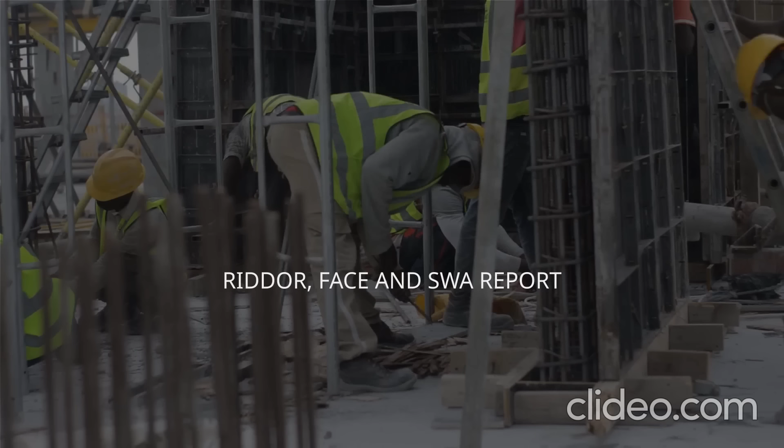In the case of the Houston accident, there were 7 injuries in total, of which 3 were seriously injured, who required special attention and were reported as serious cases. However, the remaining workers suffered minor injuries. Though some of the workers suffered minor injuries, all the injuries and death casualties were immediately reported because of the

severity of the case. The reason this accident created hype was that the Houston crane accident was not the only accident that occurred in the USA. There had also been a series of accidents reported, such as the crane accidents of New York 2007 and Miami 2008. FACE and SWA report.

Similar to the RIDDOR report, under which the deaths and injuries of the occupational class are reported, the FACE and SWA reports also function similarly to the RIDDOR framework. These FACE and SWA reports were developed in the year 1970 by the National Institute for Occupational Safety and Health, NIOSH, which is the United States federal agency that conducts research and proposes recommendations for the prevention of work-related injuries.

The FACE reports are basically a national research program that is similar to the RIDDOR program and is mainly aimed to provide guidance to prevent employees and workers from job-related injuries and deaths by following some guidelines and considerations. According to the research study conducted, these programs and frameworks investigate selected fatalities and identify and evaluate hazards.

Furthermore, these frameworks also provide guidelines related to the development of workplaces, meanwhile providing prevention and recommendations to the employees and all associated stakeholders. The effectiveness of the SWA report, which is very much similar to the FACE report, is well accepted. Since its introduction, it provides perfect guidelines and precautions to the workers regarding their safety and health management issues,

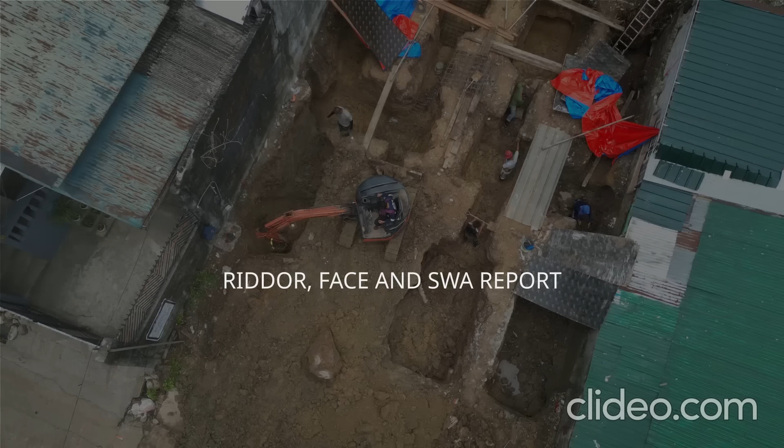The realization and need for seeking informed decision-making support in project management have enabled the health and safety managers to utilize the knowledge in demanding areas like management of megaprojects to ensure health and safety. Learning lessons from past experiences can be effective in minimizing the chances of accidents in the construction and management processes. Similarly, considering the case of subway construction, in the past several cases have already been reported related to oxygen cylinder explosions, which have also caused several injuries and deaths.

However, the management of subway construction did not take special attention and was not fully aware of the danger that leads to the casualty; things can be done after an accident that can minimize the effects of the accident. The understanding and examining of accidents is only possible by determining every single cause of the accident. Evidence-based learning methods have been the most effective approach that professionals and clinicians have adopted. It has been rated as an instrumental approach to support effective professional learning and problem solving.

In light of the study conducted, evidence-based practice has been introduced in clinical practice for carefully examining and implementing best practices in decision-making. Furthermore, the general practice of evidence-based learning involves the assessment of patients, specifically asking particular questions of patients regarding the incident or any casualty. In addition, evidence-based learning also involves appraising the evidence and incorporating it with clinical expertise, meanwhile evaluating the performance. However, evidence-based learning for health and safety management in megaprojects involves the consideration of facts, experiences, expectations, the project guidelines and regulations, meanwhile considering the project design through a similar procedure.

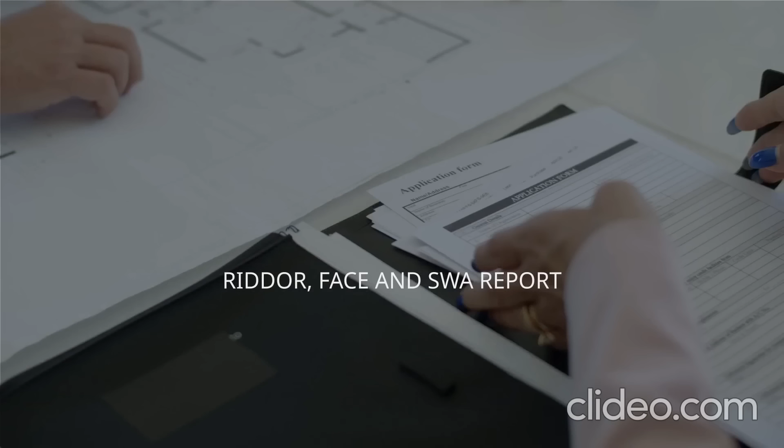According to the research study conducted, evidence-based learning has greatly integrated evidence-based management. In addition, evidence-based learning in light of management has both levels, strategic and tactical. In the complex world of construction megaprojects, effective health and safety management is crucial.

This research introduces an evidence-based health and safety analysis framework designed to bridge gaps in current practice. By utilizing proven methods such as the RIBA plan of work and drawing insight from documented case studies and incidents, the approach enables systematic learning from past experiences. The goal is to deliver actionable lessons and structured processes, supporting safer, more efficient management throughout the entire project lifecycle. Through this, the research study aims to minimize the literature gap regarding evidence-based learning associated with health and safety management in megaprojects.

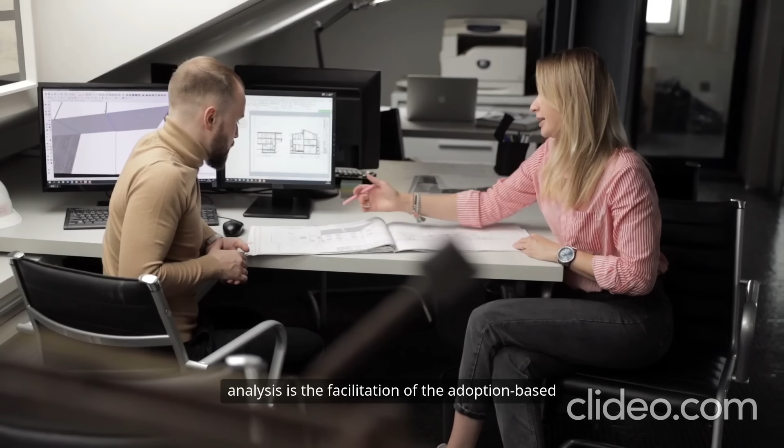Technical analysis. The fundamental rationale behind carrying out technical analysis is the facilitation of the adoption-based method, which is going to be used for the purpose of evaluating the safety management process that is going to be used in the process of further safety and management initiatives.

The individual that is responsible for carrying out the technical analysis of EHSA is the health and safety manager of the building. It has been found from the overview of literature in this regard that the framework for EHSA includes RIDDOR process, staged building refurbishment processes, and the process of decision-making of EHSA.

The procedure of the entire work has been based on the implementation of EHSA framework in the specific construction-related accident that needs to further fulfill the requirement of the existing procedure that can be applied to the practice.

The purpose of this research is to incorporate a formal procedure that could cover the life cycle of the building while covering the need of incorporating the technical review on the prospect of health and safety management in the context of construction-related accidents. Therefore, the plan of work offered by RIBA has been ideal for providing the work procedure which is then to be adopted for EHSA framework for construction-related accidents.

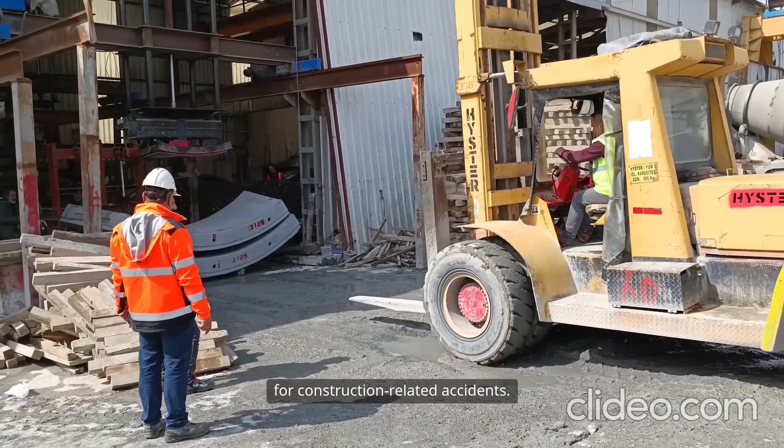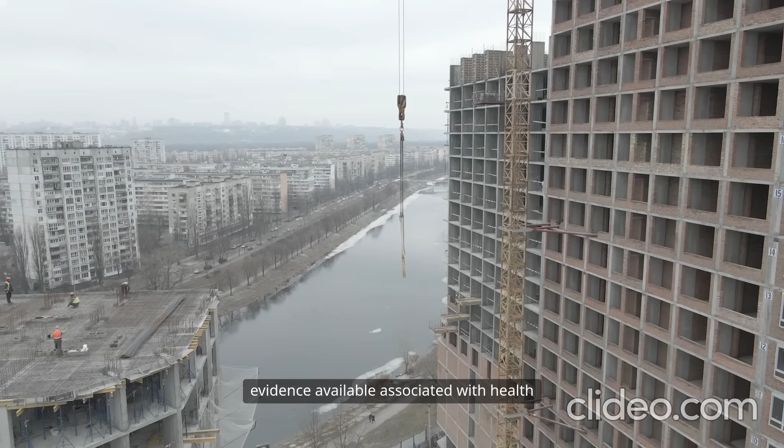The implementation of the framework of EHSA also required the case base that can provide a due amount of evidence related to the areas as well as from the past projects incorporated by the site management that will conduct and apply the EHSA framework and the ones present on local and international level. Even there were numerous other sources of evidence available associated with health and safety management in megaprojects.

One specific source of evidence, for instance, the documentation from the RIDDOR, has provided the structure of the case study that has been based on the information that was available on RIDDOR and other databases. Therefore, the particular structure has been needed for the case study in order to collect information in the consistent format, which would further help to retrieve evidence from EHSA case base.

The conceptual framework for the safety and health management at megaprojects of construction has been developed in accordance with the technical analysis. Technical description. The systematic technical framework has been developed at the first stage of the research paper.

As it has been demonstrated, the framework has been designed for the purpose of including all the activities in order to implement the generic and evidence-based learning and work procedure, and for that RIBA plan of work has been chosen in order to adapt for catering the need for using the EHSA framework in the health and safety management of the construction projects.

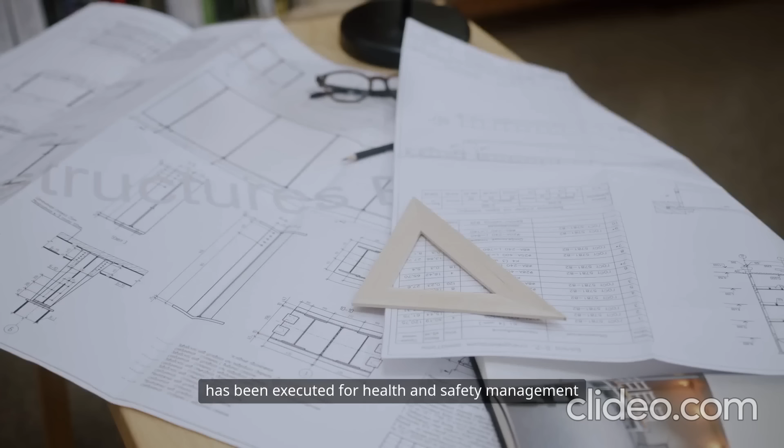All the activities of EHSA framework, as well as its technical steps, are all interrelated in order to ensure that the effective application of the evidence-based learning has been executed for health and safety management at the construction megaprojects. There are certain activities which are going to be carried out for the purpose of carrying out megaprojects. These projects are extremely large-scale projects with large-scale investments.

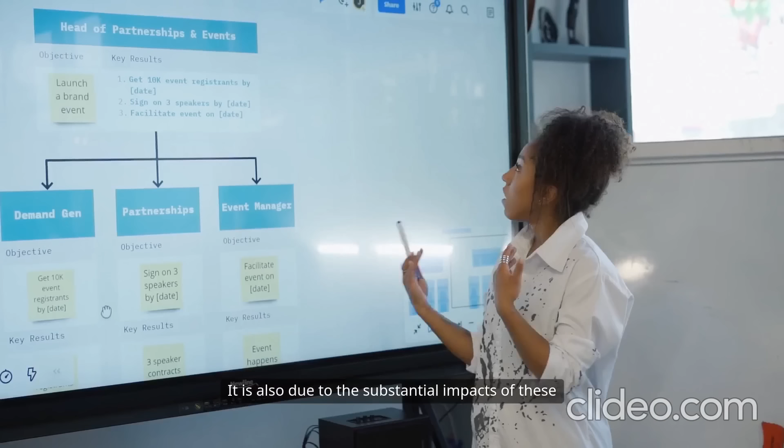The megaprojects are also categorized as extremely expensive and complex on both human and technical terms. With respect to this, these projects require robust development and planning, due to which these projects obtain higher public attention. It is also due to the substantial impacts of these projects on communities, budgets, and environment, as well as the involvement of high costs. Therefore, these projects are physical initiatives having a capability of being expensive and public. Following are the activities. About the long-term needs of construction project management.

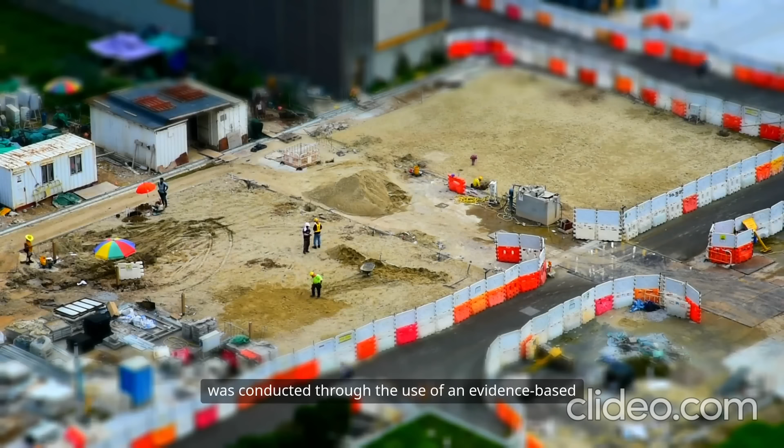This paper aims to provide an evidence-based health and safety analysis, EHSA, approach, and a list of reliable lessons learnt on health and safety in building refurbishment project. The research described in this paper was conducted through the use of an evidence-based method, EBM, underpinned by literature review and case studies. This paper describes a generic EHSA framework to support the use of knowledge reuse in practice-oriented research into health and safety management on building refurbishment.

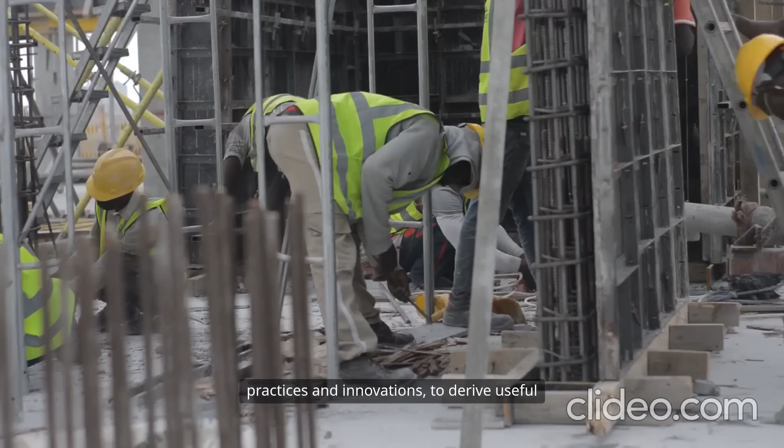This paper aims to facilitate the collection of data and information from accidents and failures, as well as contemporary good practices and innovations, to derive useful lessons to inform improved practice in safety management in construction projects. Through the use of the theoretical framework, this paper demonstrates, through case studies, how this EHSA approach can effectively support learning lessons from previous construction projects.

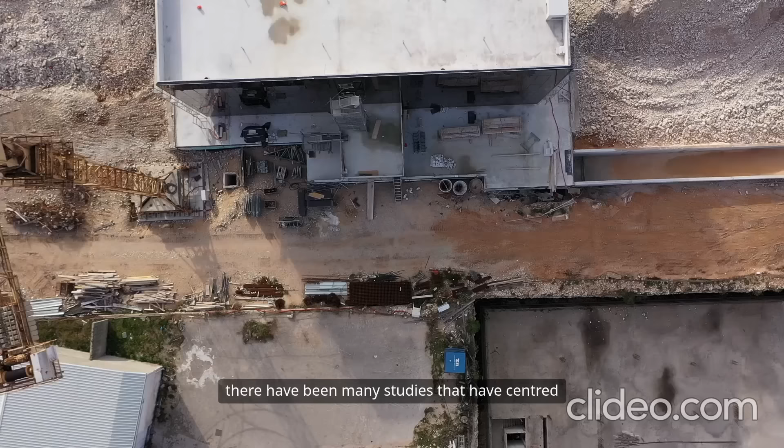It is expected that this paper can make a good contribution to the body of knowledge by providing the new EHSA approach and a list of reliable lessons learnt with regards to construction health and safety. In the last decade, there have been many studies that have centered their attention towards assessing the best health and safety management procedures for building refurbishment and construction projects, considering environmental impacts in developed as well as developing countries. It is essential to consider this aspect in existing construction projects and new construction projects.

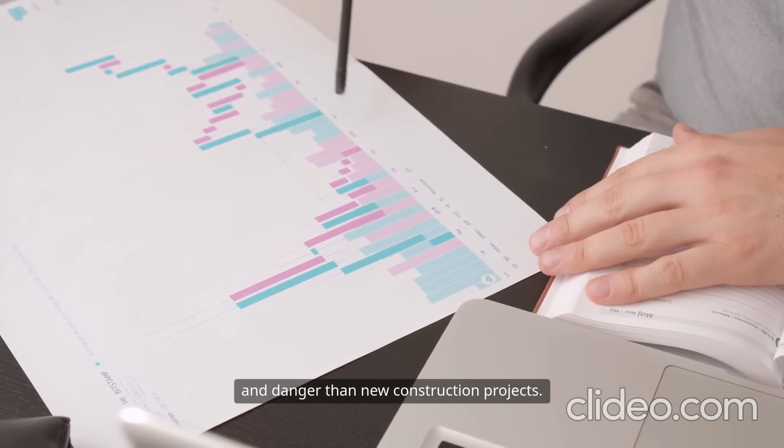This paper aims to provide an EHSA approach and the consistent lessons learned on health and safety in mega construction projects for evidence-informed construction management and mega construction projects. Mega projects involve more uncertainty and danger than new construction projects. All those who contribute to the planning, design, construction, commissioning and management of a mega project need to be aware of the potential health and safety risks that might arise.

Construction project refers to the working on the current construction so as to enhance their environmental performance by taking sustainable processes and procedures into account. Herein, sustainable construction is similar to sustainable improvement that associates with construction of buildings.

Mega construction projects comprise more uncertainty and risk about the health and safety issue than other projects. The projects are associated with economic as well as technical uncertainties, and these risks need to be reduced by adopting safety management procedures. According to the research, there are 5 types of risks related to mega projects such as design information risk, cost risk, external and internal risk, and client briefing risk as well.

Based on these aspects, the paper will not outline the risks associated with mega projects, but it will establish the background of the study while formulating the objectives and understanding the research methodology that would be incorporated, taking into account assessment method and proposed solution, lessons as well as recommendations while responding to the refurbishment of the building.

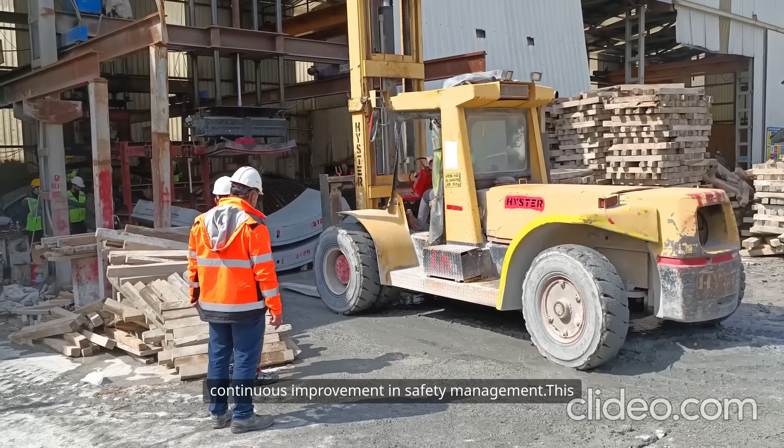This paper aims to provide EHSA approach and a list of reliable lessons learnt on health and safety in building refurbishment projects for evidence-informed health and safety management. This research has been conducted considering the following objectives to achieve the aim. A theoretical framework called EHSA approach to support the use of EBM in practice-oriented research into health and safety management for building refurbishment. A procedure to implement the framework to collect data and information from accidents and failures, as well as contemporary good practices and innovations.

Also, to eventually derive useful lessons to apprise improved practice in safety management while building refurbishment. A demonstration through a case study as to how EHSA approach can effectively support learning lessons from previous building refurbishment projects. The research methodology adopted comprises a detailed literature review highlighting the aim and objectives of the study.

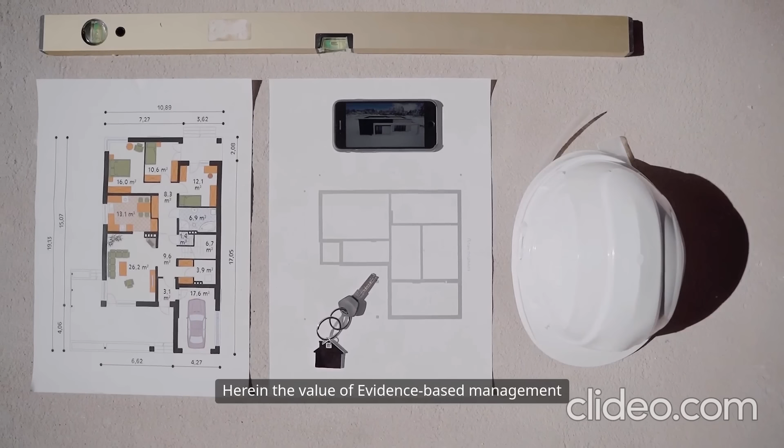Herein, the value of evidence-based management in managing risks and its significance is outlined through EBM framework. Following which, ESHER and its importance are highlighted by detailing a theoretical framework of the ESHER approach and its implementation procedure. Furthermore, information safety management is defined, and a case study is discussed, subsequent to which the lessons learnt from the case study and recommendations for the same are outlined in the research showcasing and asserting the aim of the study.

The infrastructure and construction industry is the most demanding and at the same time, the most vigilant industry. It demands the workforce involved in this industry to be attentive and observant. Through the survey conducted by APM, it has been highlighted that 50% of the issues and workload has been found in the infrastructure and construction domain. There have been many accidents reported in this industry because of sheer ignorance, incompetence, and inability. It has also taken lives of innocent people, which needs to be mitigated. However, approaches such as EBM and ESHER comprise such regulations and framework which help in mitigating such risks and providing a stable and error-free certification.

As the mega projects are complex and unique in nature, there is need for a strong procedure to finish within the stipulated process. As per the current practice, the major stakeholders are serious about the stipulation of boundaries, but there are no such strategies which can control the systematic progress. Unfortunately, knowledge reuse is also not used by the industry practitioners. The study has been directed at understanding how health and safety management is important in the process of construction projects. With the advancement in technology, a lot of procedures and functionalities have changed, and it has also improved the skill set of the workforce. Evidence-based learning enhances sustainability and is a significant step towards safety management during construction.

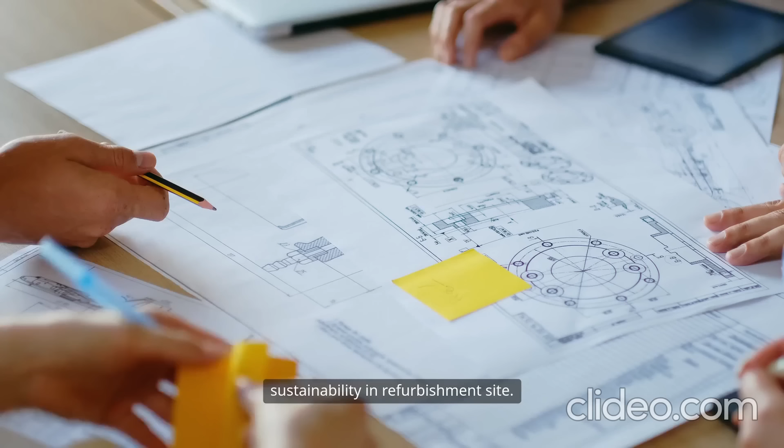By utilizing knowledge reuse strategies, the mega projects industry can reduce risks at mega project sites in a systematic and operating process. On the other hand, the construction strategies recommended can be taken into consideration, which will make sure of selecting the right techniques and tools in managing and reducing risks. This will also enable them to optimize production and select right materials to minimize the impact of refurbishment risks and collapses. Moreover, the EBM framework will ensure good work quality by maintaining sustainability in the refurbishment site. By adopting building refurbishment techniques and strategies, UK refurbishment industries can upgrade their quality of performance by making reasonable changes, which will lead towards success.

EBM became a mainstream conception during the 1990s, and it started becoming acknowledged as an approach which considers and integrates the notion of ecological as well as socio-economic connectivity along with holism. Also, EBM outlines sector-based approaches to managing the process of refurbishment. The study also outlined the equivalent standard approach, which comes under alternative safety approaches, ASA, constituting evidence-based safety analysis, ESHER.

Implementing ESHER under the ASA process necessitates commitment and seriousness from both parties, and before implementing it, expectations are that all the applicants have had an interaction with the safety authority. The ESHER comprises an application and a proposal which is submitted as an application package to the safety authority.

Once the package is reviewed by the authority, they might ask for more details before deciding on something. Once they determine the proposal, a written notification is sent out for the proposed outcome. It depends on the Safety Authority Board to accept or reject the proposal as deemed fit.

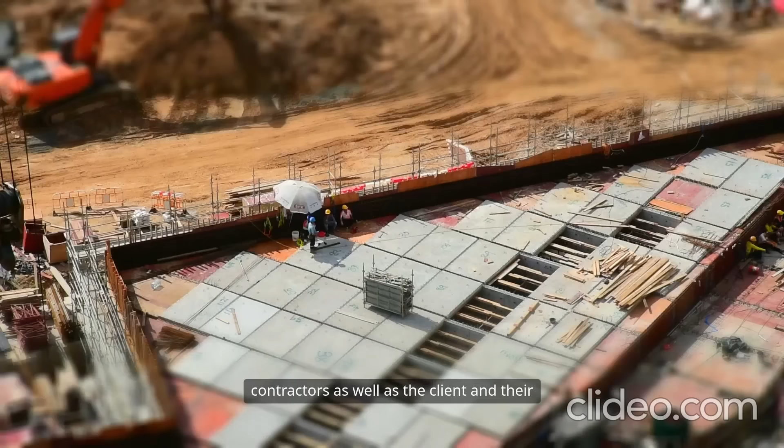The accidents on the site can impact the contractors as well as the client and their business in building refurbishment. It may affect the efficiency and productivity of the labour and employees related to the refurbishment work. It may also result in people leaving the work for injuries and sick leave. The revenue generation of the project could decrease due to the specific delays in completion of the work or because of the damages to the structure that are caused by the unplanned collapses.

The ESHER is important in the refurbishment projects. This concept states that during building refurbishment, the health and safety concerns should be taken into consideration. All the new buildings must first undergo scrutiny so that it is known how safe the building would be in refurbishing. This would also mean that the building refurbishment is carried out and safety concerns are determined by recording the evidence. Therefore, ESHER is important in this respect as well.

Health and safety measures play a pivotal role and possess a great deal of influence in the management and designing of refurbishment projects. It can be specifically stated that health and safety measures are one of the key factors in the selection of the methods of demolition for avoiding structural instability and preventing structural collapses.

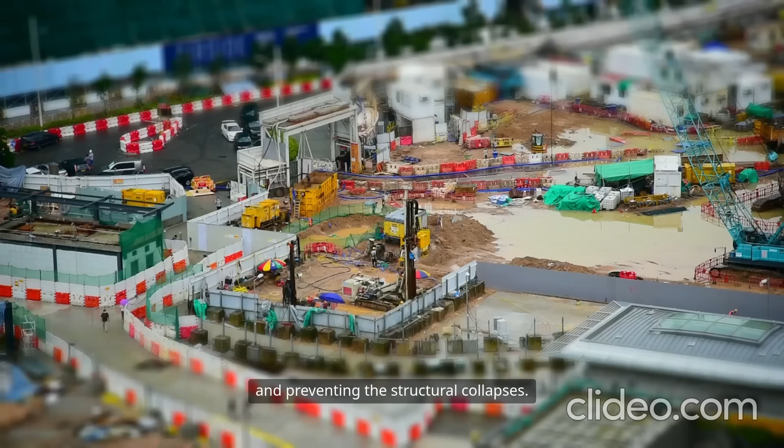It is quite critical to identify the structural collapse events with conventional and unconventional causes. Unconventional causes are related to catastrophic and natural events like floods, earthquakes, avalanches, etc., whereas the conventional causes can be verified, reduced, controlled, or removed.

However, evidence-based safety management is an essential aspect since it assesses the economic cases of refurbishment comprising impact on communities and residents, focuses on energy and carbon implications compared to refurbishment, and also integrates social factors. Also, the UK supply chain market lacks sufficient information, so evidence-based safety management assists the market to consider varied hidden costs which are related to refurbishment.

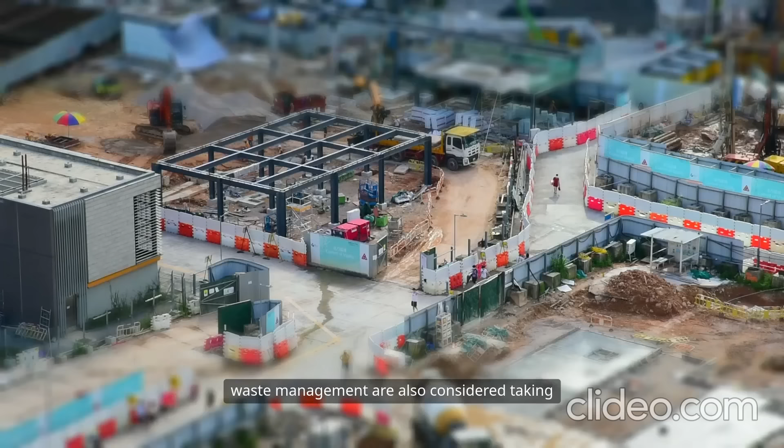Considering the current standards of newly built houses outlines that such houses have low operational energy as compared to old ones. But refurbishment of buildings can accomplish lower operational energy levels and can switch fuel sources taking renewable resources into account. Other essential aspects such as water and waste management are also considered, taking into account social factors of well-being, housing, health and urban design as well.

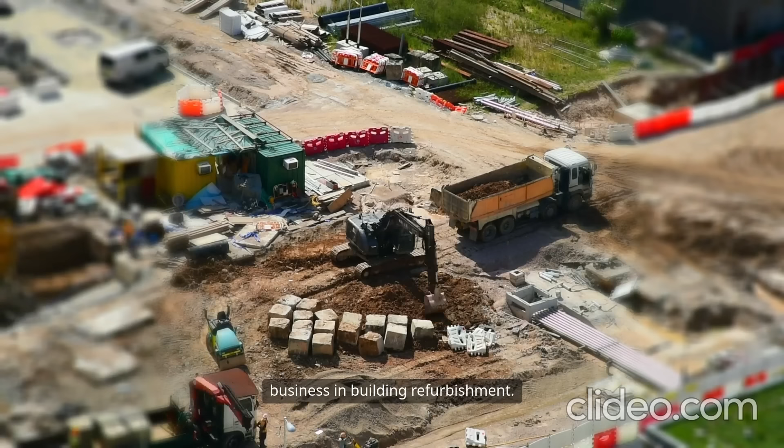The accidents on the site can impact the contractors as well as the client and their business in building refurbishment. It may affect the efficiency and productivity of the labour and employees related to the refurbishment work. It may also result in people leaving the work for injuries and sick leave. The revenue generation of the project could decrease due to the specific delays in completion of the work or because of the damages to the structure that are caused by the unplanned collapses.

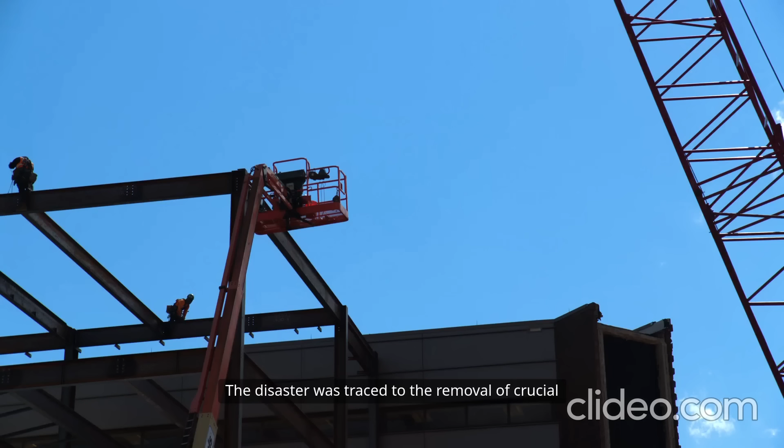The tragic collapse of the Ashford building, resulting in the loss of 4 workmen's lives, highlights the dire consequences of inadequate safety management during refurbishment. The disaster was traced to the removal of crucial structural elements, a mistake rooted in poor oversight and a lack of proper risk assessment.

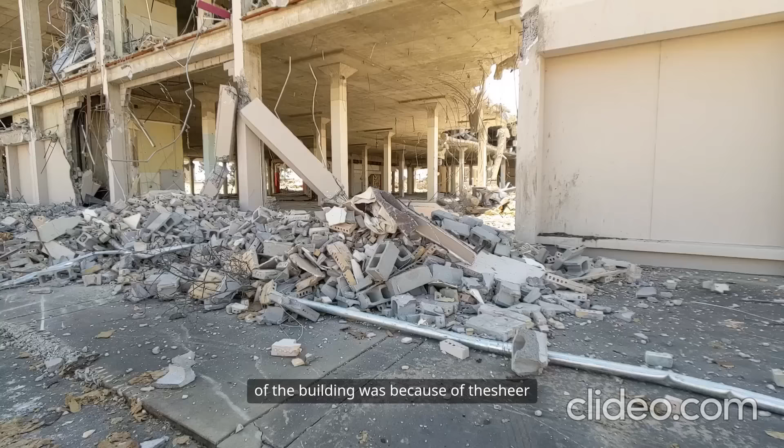Implementing evidence-based management and the ESHER approach could have averted such tragedy by ensuring safety protocols were informed by past incidents and best practices, ultimately safeguarding both workers and buildings. The case of the Ashford building, where 4 workmen died because of the collapse of the building, was because of the sheer incompetence of the construction workforce.

A published report stated that there was no problem for a long time since the load of the bricks above was distributed through the building by the adjacent window frames and blockwork. When refurbishment started, the workers began removing this blockwork, increasing the structural load on lightweight concrete blocks. It resulted in the rapid and disastrous collapse of about 2/3 of the building. It was sheer irresponsibility of the people who were engaged in this construction work, and it was all on the management.

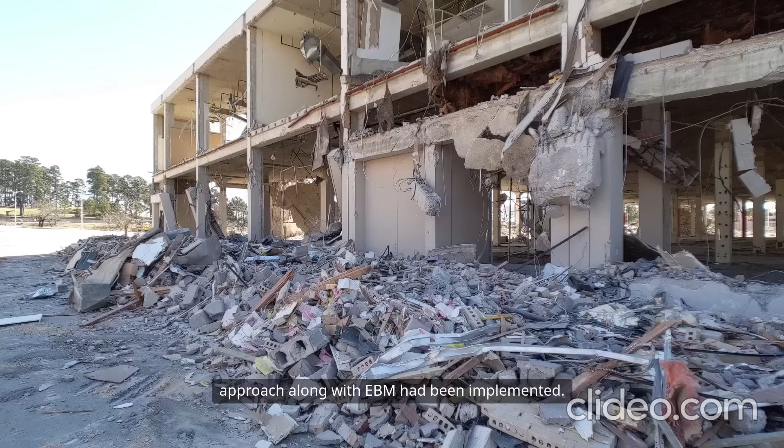As per the case study which resulted in the death of 4 workmen, the accident could have been avoided if ESHER approach along with EBM had been implemented. It has been learnt from this research that EBM for safety management for the building refurbishment is the most effective method. This is because this method helps in facilitation about information and data collected from the accidents, as well as failures and innovative designs. It has also been learnt that ESHER is helpful for safety management in the building refurbishment.

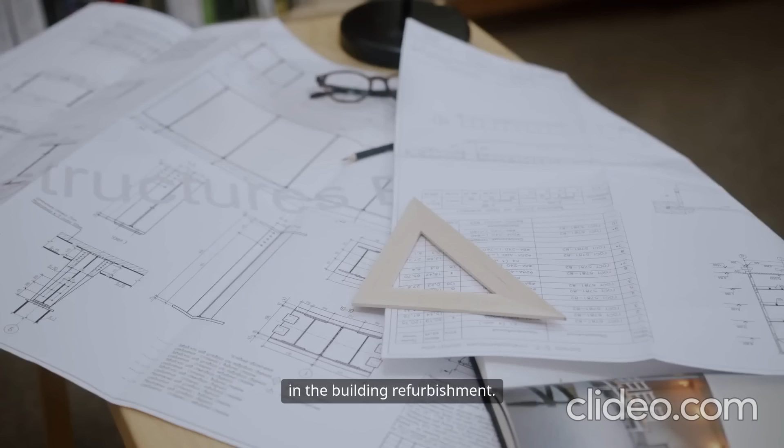Based on the research undertaken, building refurbishment requires a lot of safety and consideration of several factors to ensure that all risks involved are managed effectively to minimize any dangers. It is intended particularly for clients in refurbishment firms who have limited experience of refurbishment in buildings, but it has lessons for more experienced experts. The entire study shows that the refurbishment industry needs to have the proper accessibility of the safety measurements and need to make good use of the safety management tools.

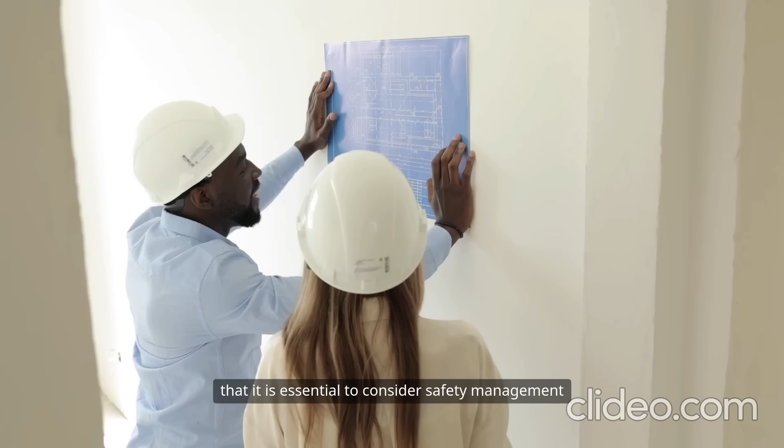The understanding developed through EBM and ESHER approach helps in analysing the situations that it is essential to consider safety management before refurbishment of any project. Thus, there needs to be a proper risk, as well as the safety measurable policies, which will ultimately help in governing the different measurements as well as to give the better productivity out of it. The healthy environment is crucial for the staffs that are working there. They need to be protected and secured enough. There need to be proper treatment regarding the hazardous wastes, and at the same time, the relevant enactment of the different rules and the procedures.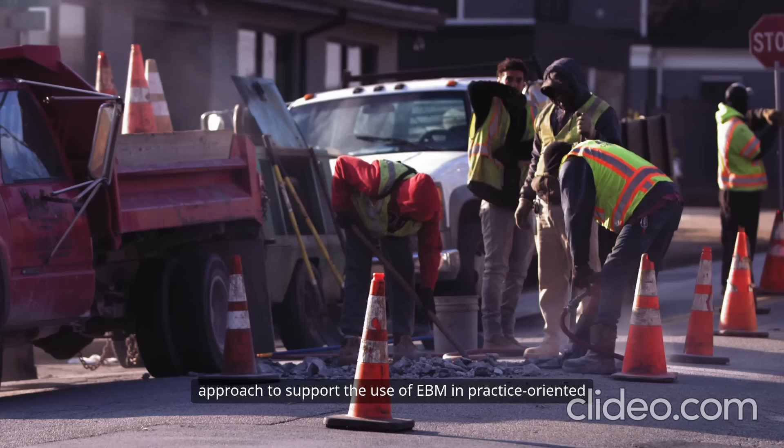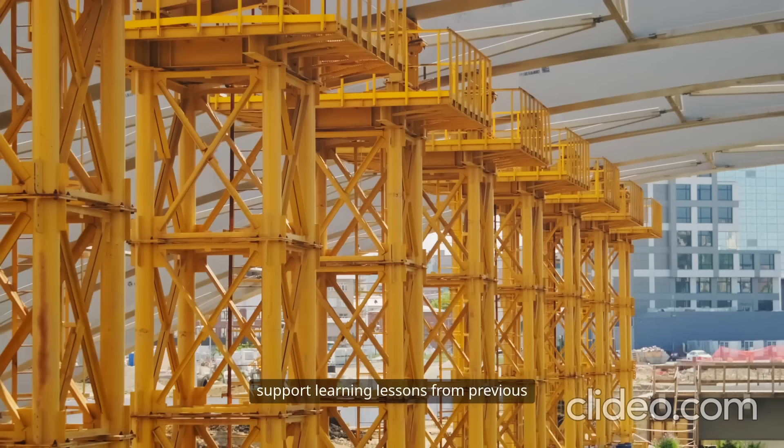However, this paper provides an ESHER approach to support the use of EBM in practice-oriented research into safety management for building refurbishment. A procedure to implement the framework to collect data and information from accidents and failures, as well as contemporary good practices and innovations. Also, to eventually derive useful lessons to apprise improved practice in safety management while building refurbishment, and a demonstration through a case study as to how ESHER approach can effectively support learning lessons from previous building refurbishment projects.

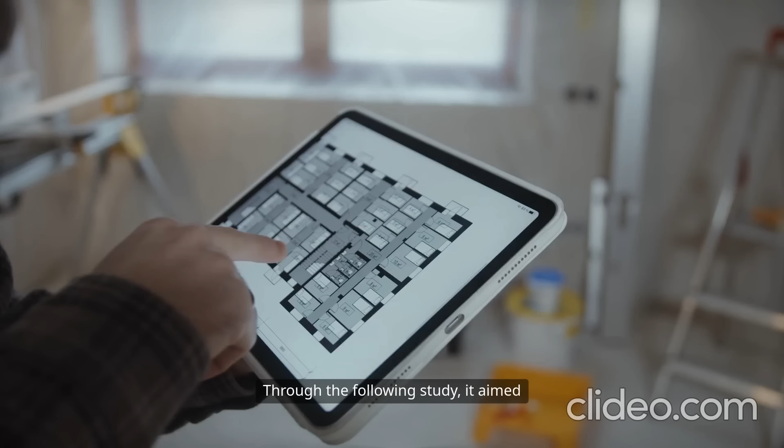It has also been identified that the theoretical approach and framework involved leads to a better understanding of the ways in which ESHER framework can be studied and applied to the process of refurbishment of the buildings. Through the following study, it aimed that the background of the refurbishment industry and the safety measures that are necessary is discussed. Further, it is aimed that the detailed study of ESHER and EBM approach is done with a case study for in-depth analysis. Refurbishment work represents some 41% of UK construction activity overall, and it is considered to be more hazardous than new building construction. Quah 1988.

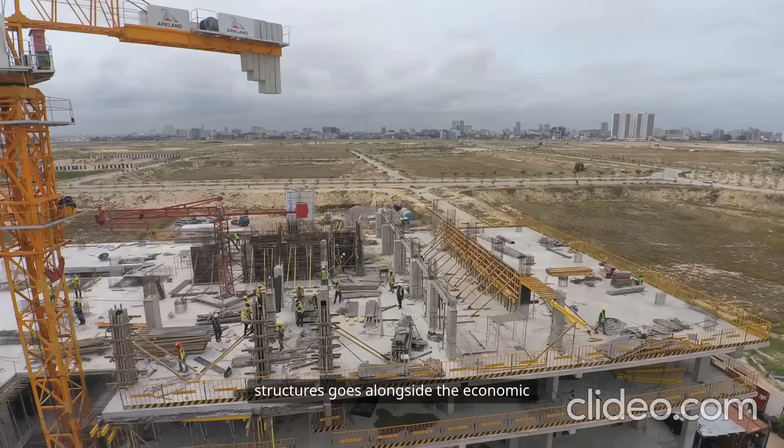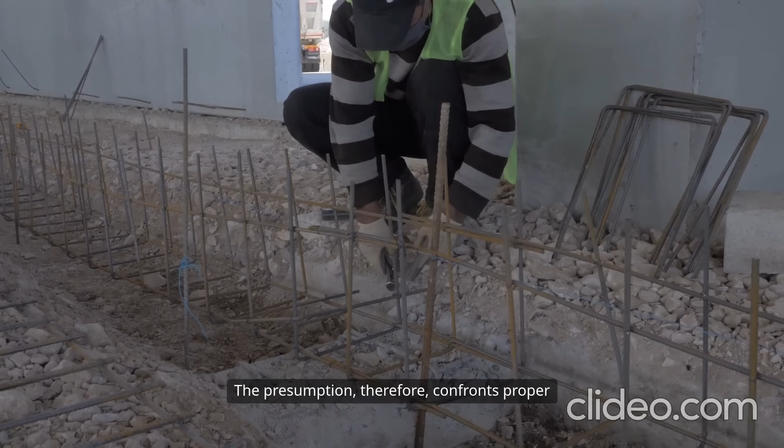Consideration of refurbishing the structures goes alongside the economic factor, which means spending less compared to setting up a new one all the same. The mounting or escalated rate of refurbishment further reflects on the mounting risks as accidents became rampant in history. Apparently, until such time reliable data of refurbishment accidents becomes available, it can be assumed that at least half of all construction accidents occur during refurbishment projects. The presumption, therefore, confronts proper establishment of procedural steps that can be applied in the refurbishment process.

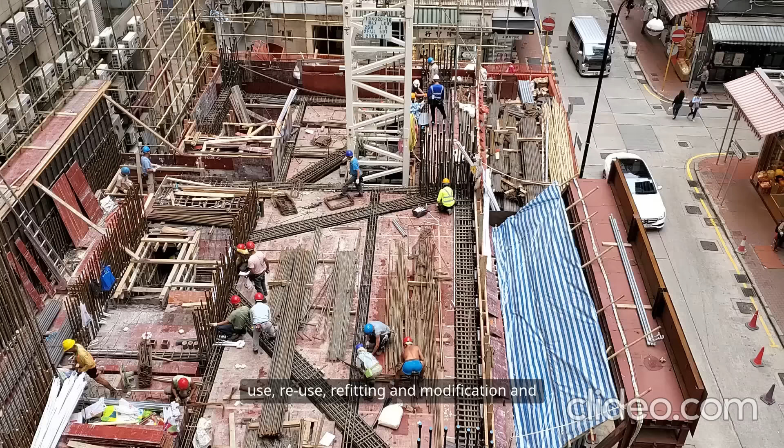The practical aim of this paper is to use evidence-based analysis to provide a more secure framework for decisions and procedures to ensure safety. The consideration is not only felt while the refurbishment work is being undertaken, but also during the subsequent periods of building use, reuse, refitting and modification, and when further adaptations are undertaken until the time of demolition. The value of EBM in managing risks.

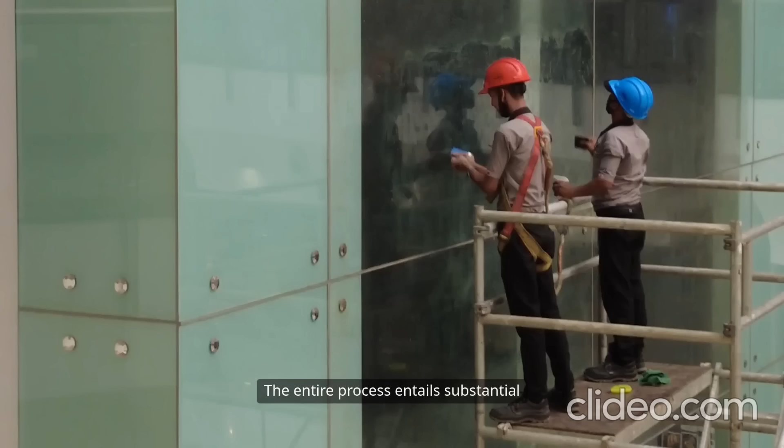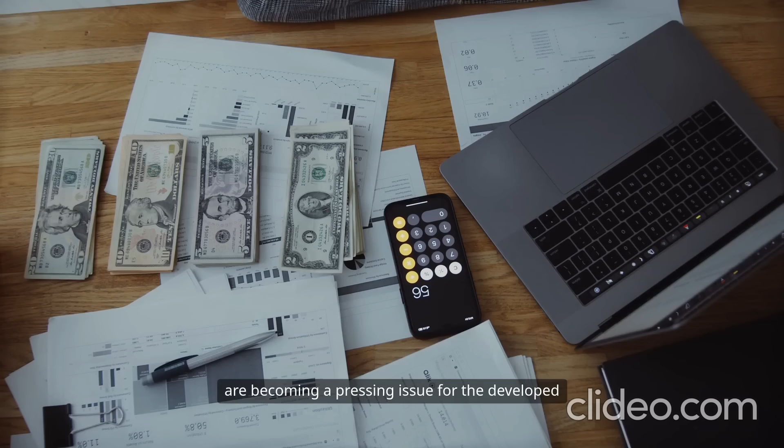Every year in the UK, the insurance companies pay millions of pounds in claims that follow the destruction of the buildings during the process of refurbishment, new construction and extension. The entire process entails substantial risks and dangers that might result in serious structural collapse, fires and security breaches as well. The entire process can cause project delays and amplified costs, ensuing undesirable pressure for the owners of the home as well as for the neighbours. Kasperson et al. 1988. However, the risks seen at refurbishment sites are becoming a pressing issue for a developed country like UK that has a huge impact on the productivity of refurbishment industries of UK.

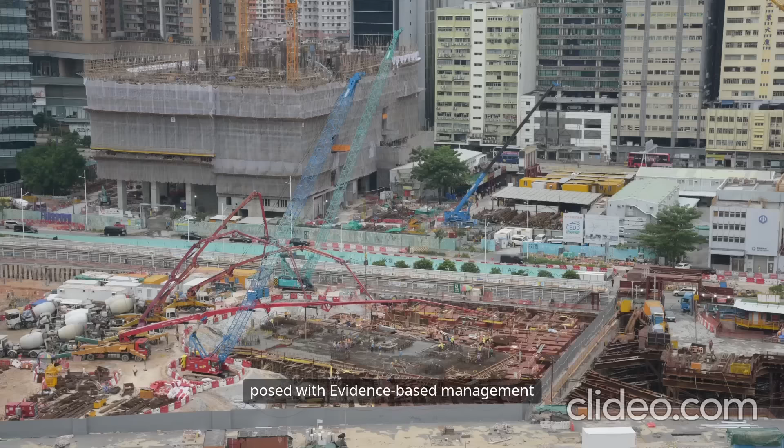It puts a tremendous impact on the environment as well as on human life, and however, such issues can be resolved when the entire community will work collaboratively and implement new strategies of building refurbishment policies posed with evidence-based management, EBM, framework that enhances sustainability. It is important for every individual to understand the importance of identifying and preventing risks so that it enables them in identifying and reducing the risks that take place in refurbishment sites.

By utilizing EBM framework lessons and strategies, UK refurbishment industry can reduce risks at refurbishment sites in a systematic and operating process. On the other hand, the building refurbishment strategies recommended can be taken into consideration, which will make sure of selecting right techniques and tools in managing and reducing risks. Rousseau, 2006. This will also enable them to optimize production and select right materials to minimize the impact of refurbishment risks and collapses. Moreover, the EBM framework will ensure good work quality by maintaining sustainability in refurbishment site.

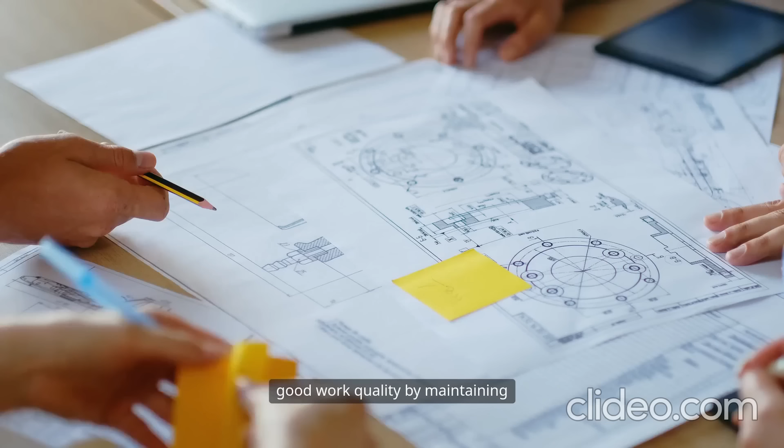Evidence-based management does not depend on experiences or disposition. The research is valid enough as it will motivate and suggest the refurbishment process in managing refurbishment risks. Using building refurbishment policies allows them to take effective measures to reduce refurbishment risks.

The refurbishment industries in the UK need to implement their policies taken from the EBM framework to achieve the sustainable goal. By adopting building refurbishment techniques and strategies, UK refurbishment industries can upgrade their quality of performance by making reasonable changes, which will lead towards success.

EBM became a mainstream conception during the 1990s, and it started becoming acknowledged as an approach which considers and integrates the notion of ecological as well as socio-economic connectivity along with holism. Also, EBM outlines sector-based approaches to managing the process of refurbishment, the basic principles which are followed through the EBM

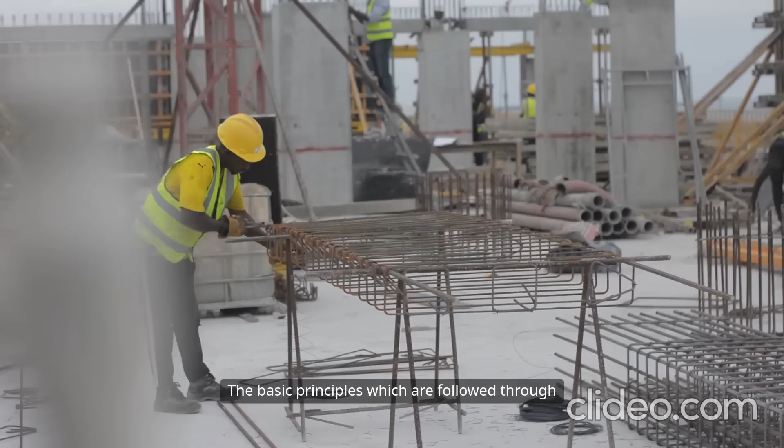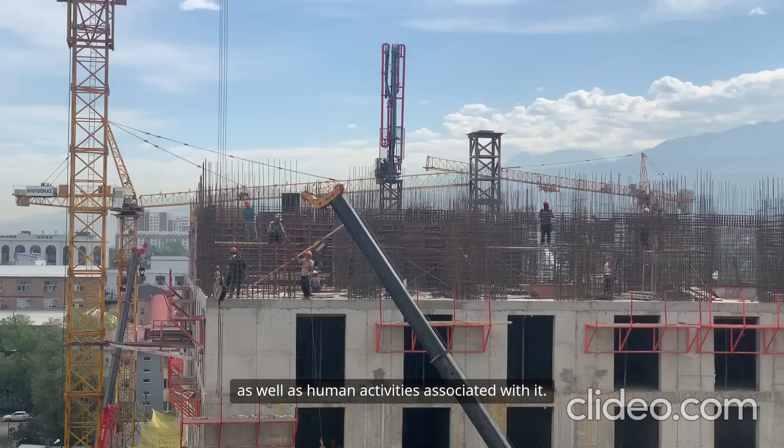processes. Firstly, EBM focuses on a particular place and ecosystem, and considers the varied activities and undertakings which impact the ecosystem, comprising physical as well as human activities associated with it. Secondly, EBM puts emphasis on safeguarding the structure of the ecosystem, its functions and approaches.

Thirdly, EBM clearly integrates interconnectedness within the systems, acknowledging the significance of communication amongst the key services. Fourthly, EBM also addresses interconnectedness between environments like sea, land, and air. Fifthly, EBM incorporates the social, ecological, institutional, and economic perceptions, acknowledging their interdependence as well as mutual effects.

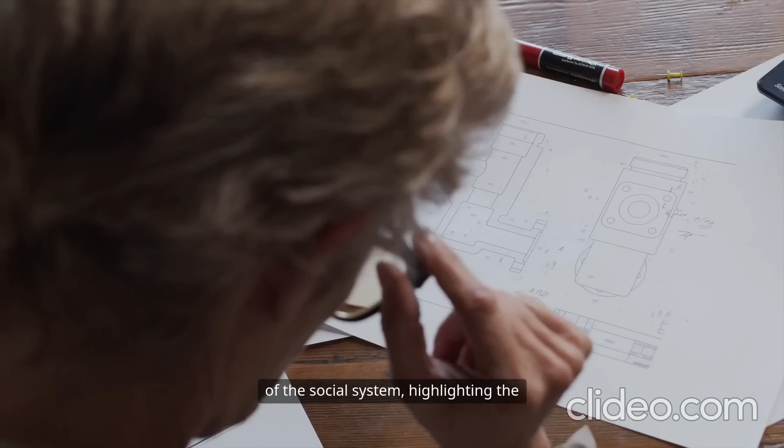Lastly, EBM addresses the management sectors and also contemplates significant relationships and interactions amongst constituents of the social system, highlighting the necessity for combined governance procedures. Ecosystem-based management, or EBM, brings a holistic perspective to managing both natural and human systems. It recognizes that people, like managers and stakeholders, are inseparable from the ecosystems they influence.

EBM promotes long-term planning, integrating adaptive management to allow flexibility and learning throughout project implementation. By emphasizing the sustained provision of ecosystem services, it underscores the importance of provisioning, regulating, cultural, and supporting functions. This comprehensive approach ensures that environmental decisions are informed, adaptive, and responsive to complex human and ecological needs.

There being no source of data specifically related to refurbishment accidents, 3 general sources of statistical data can be used to investigate the risks involved: the ILO safety statistics, the Registrar General's occupation mortality data, and the HSE accident statistics. The ILO data is limited to fatality statistics, aggregated on an industry basis by the nation.

The RIDDOR, Reporting of Injuries, Diseases, and Dangerous Occurrences Regulations, database is the major source of data on refurbishment injuries. For the purpose of this paper, the RIDDOR work accident data has been analysed to help establish the chances of injury across the various activities of the refurbishment industry. It also helps to indicate the priority areas for health and safety measures.

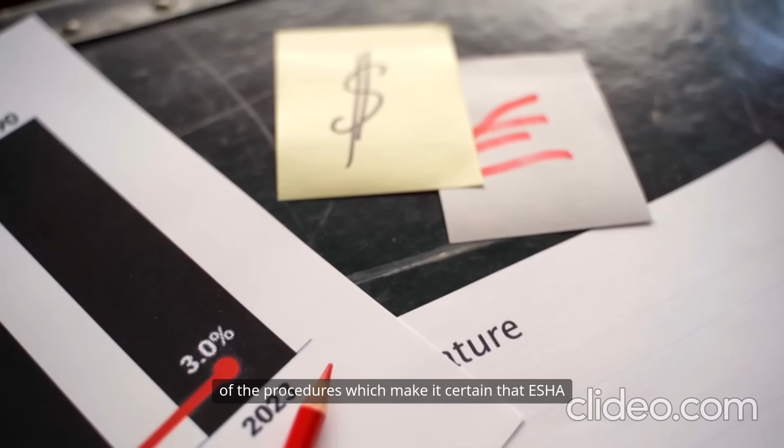ESHA comprises a detailed description of how the proponent would assess and analyse the efficiency of ESHA, wherein audit and inspection have been the main tools for sustaining the quality of the product. Audit and inspection can also be taken into account for recognising how safety can be enhanced. Herein the measures for assuring safety are assessed for their impact and effectiveness. Further, the proposal comprises a description of the procedures which make it certain that ESHA is effective and can be continually enhanced.

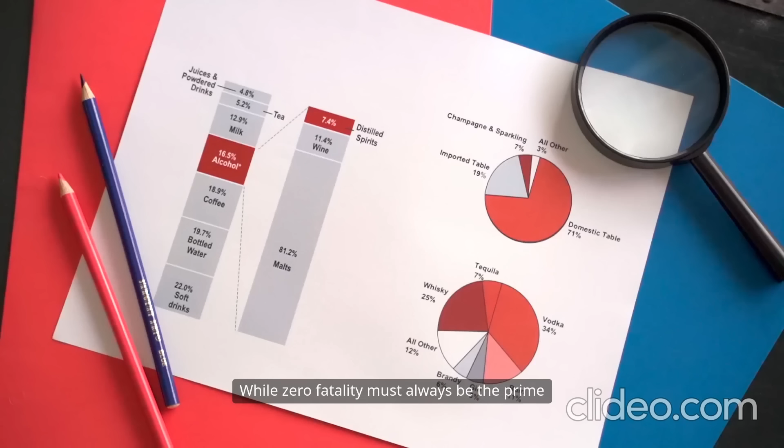In managing refurbishment projects, the focus will be to contain the forces associated with safety, risk, and health issues through strategy, operation, and tactical levels. While zero fatality must always be the prime health and safety objective, the current level of fatalities would require a special risk assessment to be taken.

Health and safety measures play a pivotal role and possess a great deal of influence in the management and designing of refurbishment projects. It can be specifically stated that health and safety measures are one of the key factors in the selection of the methods of demolition for avoiding structural instability and preventing structural collapses. It is quite critical to identify the structural collapse events with conventional and unconventional causes.

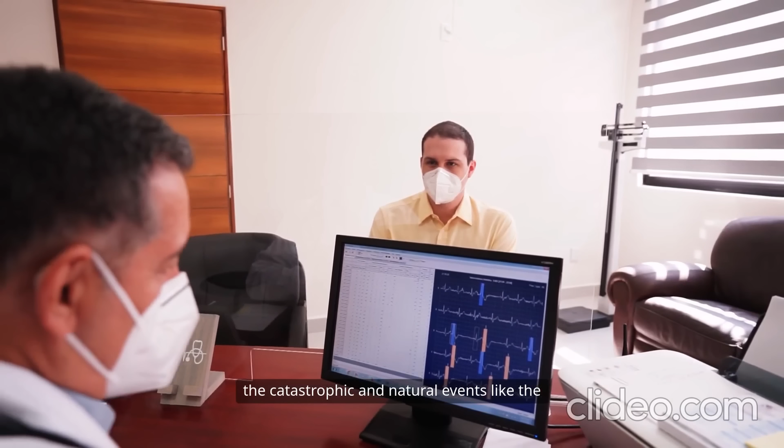Unconventional causes are related to catastrophic and natural events like floods, earthquakes, avalanches, etc., whereas the conventional causes can be verified, reduced, controlled, or removed. However, evidence-based safety management is an essential aspect since it assesses the economic cases of refurbishment comprising impact on communities and residents, focuses on energy and carbon implications compared to refurbishment, and also integrates social factors.

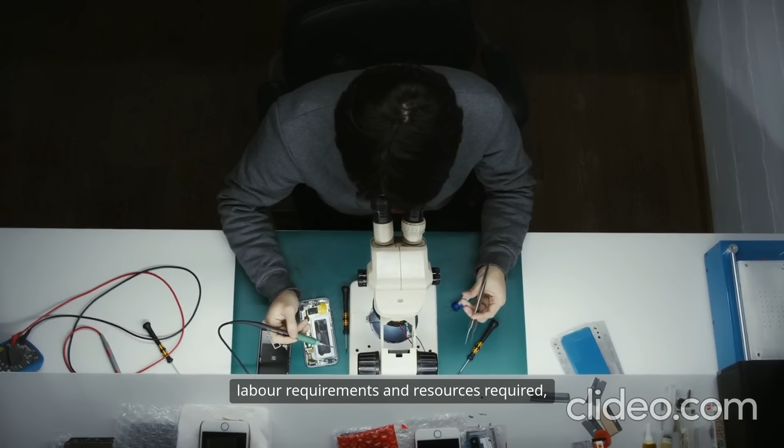According to this theory, there are only three forms of capital, namely land, labour, and produced capital resources. Only these three forms of capital are to be used for evaluating sustainability in refurbishment. Therefore, the natural capitalism theory might be of immense importance for UK refurbishment companies, as the organisations might be able to evaluate the type of land, labour requirements and resources required, which would help in waste elimination.

In a refurbishment site, the four main components are required to meet the requirement of the setting. The component of radical resource productivity helps to obtain a similar or excess amount of productivity from the utilised resource. It helps to maintain and earn a profit in the refurbishment business.

The economic case for refurbishment through evidence-based safety management is assessed, and the estimated cost and impact of refurbishment are subjective and uncertain. However, the cost indicators taken into account for such refurbishment and demolition projects are capital expenditures and capital investment appraisal. Key issues are assessed, such as the cost of waste disposal. Long-term impacts are assessed as well.

Also, the UK supply chain market lacks sufficient information, so evidence-based safety management assists the market to consider varied hidden costs which are related to refurbishment. Reyes and Mansfield, 2001. Considering the current standards of newly built houses outlines that such houses have low operational energy as compared to old ones.

But refurbishment of buildings can accomplish lower operational energy levels and can switch fuel sources, taking renewable resources into account. Other essential aspects, such as water and waste management, are also considered, taking into account social factors of well-being, housing, health and urban design as well.

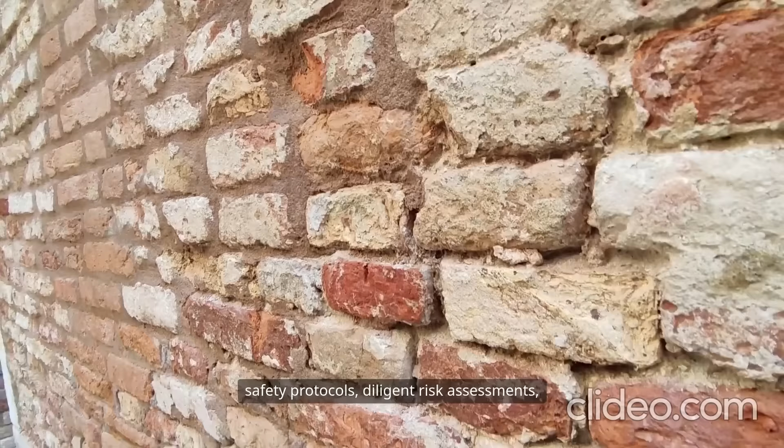The tragic collapse of the Ashford building stands as a stark reminder of the critical importance of thorough structural assessment during refurbishment projects. Originally built as a single-storey structure, subsequent expansions introduced vulnerabilities that went unnoticed until it was too late. When workers removed load-bearing blockwork during renovation, the weakened columns failed, causing a catastrophic collapse and the loss of 4 lives. This case underscores the need for rigorous safety protocols, diligent risk assessments, and adherence to building regulations to prevent similar disasters.

A case study has been observed to facilitate a better understanding of the implementation of EBA and EBM approach in the refurbishment process. It is not just to highlight the possibilities within the process of refurbishment, but also to understand at an experimental level how things can go irrational. The refurbishment projects have observed critical situations wherein the safety of the residents and also the workers has been compromised. It is therefore important to incorporate safety measures and identify the possibilities before indulging in the practice. This renders the experimental analysis an important study to build a robust safety system.

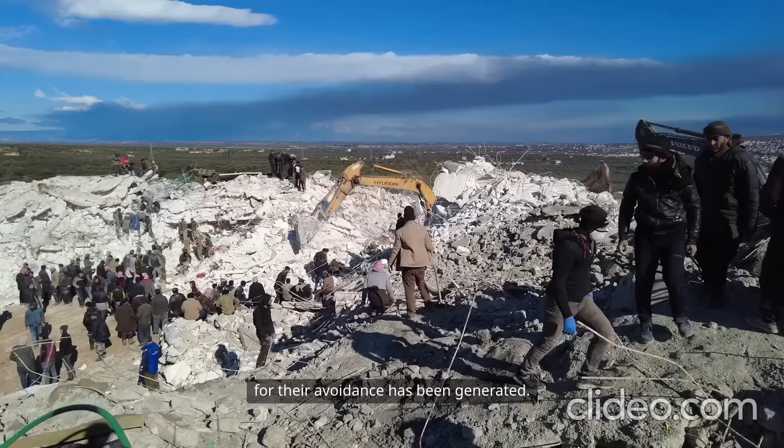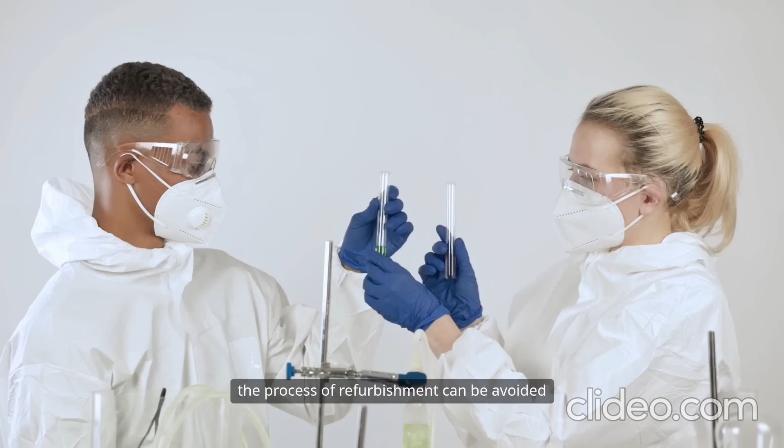Case study: Avoiding structural collapses in refurbishment. Ashford building. The Ashford building collapse killed 4 workmen, and as a result, it has been reported as one of the most important cases wherein the structural collapses and the need for their avoidance has been generated. The building, while starting on construction, was only a single-story building in the year of 1969 and 1970. In the works published by Loughborough University, 2006, it has been highlighted that the structural collapses during the process of refurbishment can be avoided through proper speculation of what the condition of the building under process is.

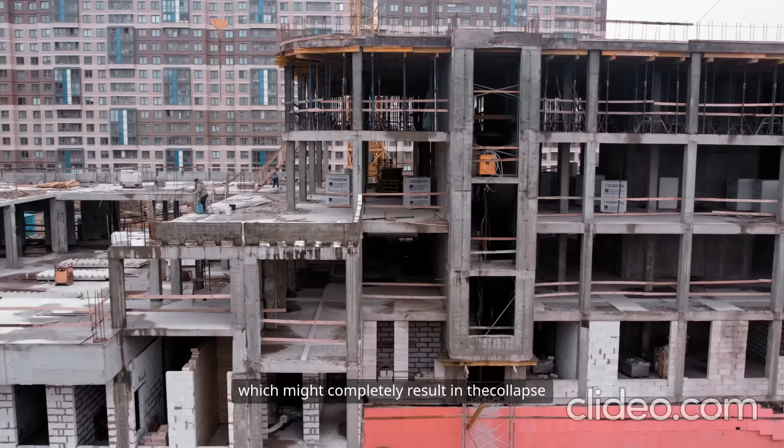The further expansion of other floors was done in 1970 and had been refurbished due to damage. A detailed investigation of the cause of damage provided information on serious defects found in the real construction of the vertical side of the extension of the structure, and huge issues concerned with safety measures and the lower rise of buildings during the change of structure. The other important aspects of the damage have been followed. The government officials had warned the people beforehand that those working on the Ashford building shall consider that there was a risk which might completely result in the collapse of the building because of small local faults. This ignorance resulted in the death of 4 workmen.

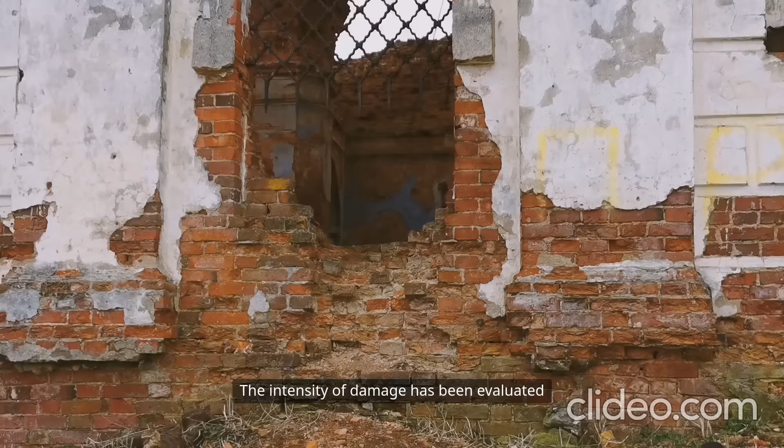The building has an extension of 3 floors, with lightweight concrete blocks used for the base and parapet wall, utilized for support of load-bearing columns in the first floor. The damage was due to one of the lightweight structures and caused immediate catastrophic damage of 2/3 of the structure. It has been highlighted that the investigation methodology serves the right match when it comes to identifying the building and its collapse during refurbishment practices. The intensity of damage has been evaluated for lack of structural continuation present in the structural elements.

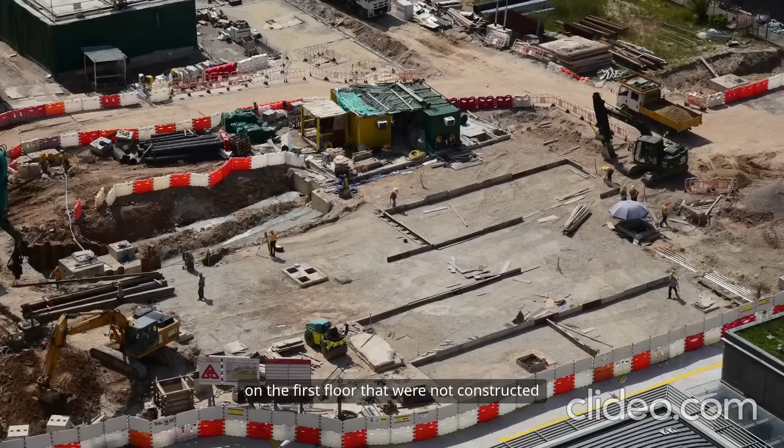The structural investigations of brick columns in the first floor presented no outer visible sign of lightweight concrete blocks in the columns. The wall had a hidden facing, internal plaster, and filled brickwork. The damages in the base contained 16 columns on the first floor that were not constructed well. The damage found the brick columns in the building to be a non-competent and irresponsible part of the real construction work and the management. HSE provided a report on the Ashford building damage in the Report on HSE Investigation, 1999. The report has the following aspects.

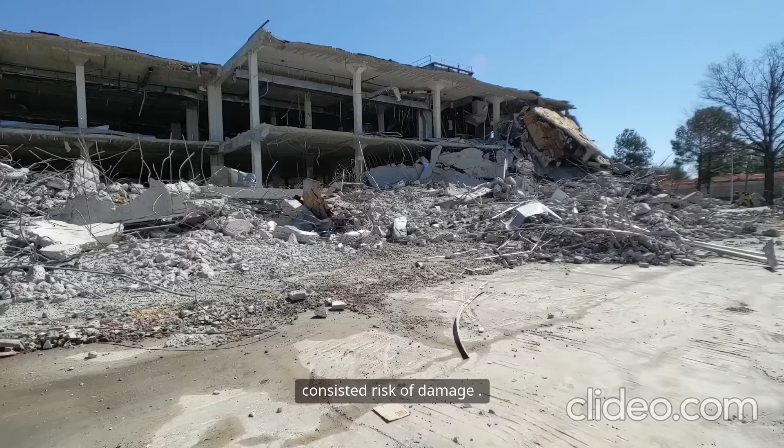The project team consisted of advisors on renovation, refurbishment and demolition, and there is a necessity for investigation. The Building Regulations Act Fifth Amendment provided information on building regulations and addressed the necessity of strong building and structural constituents. The risk assessment considered the risk of damage. Heavy plant has to be used for structural creation and is important for the building. The system has a plan, and operations should be exact in propping of the building, as required for all structural changes.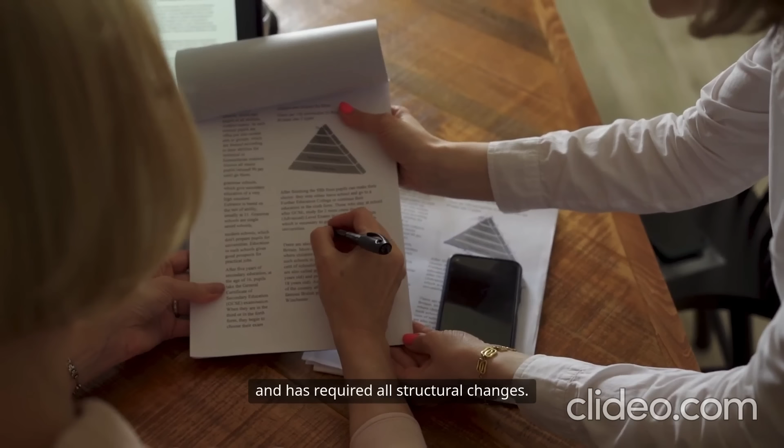A report published stated that there was no problem for a long time since the load of the bricks above was distributed through the building by the adjacent window frames and blockwork. When refurbishment started, the workers began removing this blockwork, increasing the structural load on lightweight concrete blocks. It resulted in the rapid and disastrous collapse of about two-thirds of the building.

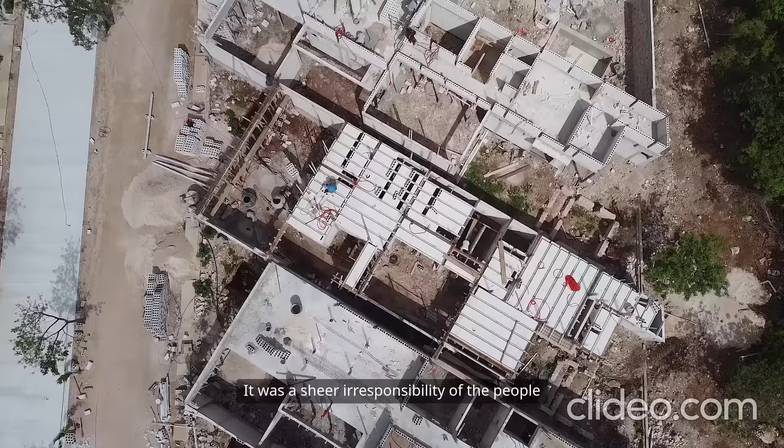It was a sheer irresponsibility of the people who were engaged in this construction work, and it was all on the management, since the construction industry demands the workforce to be vigilant and attentive, in contrast to such deliberate ignorance. The issues and defects analysed in the brick columns showcase sheer incompetence, which resulted in the loss of 4 lives (Canfield, 2000). However, if the building had been built after 1970, it would have been less prone to such a collapse. Lessons learnt.

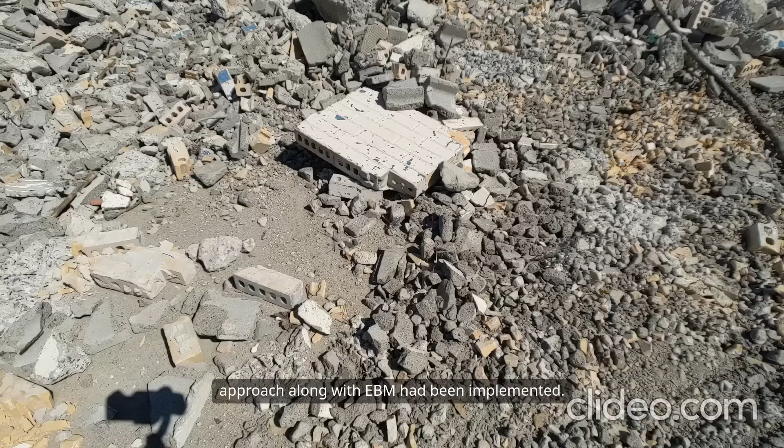As per the case study, which resulted in the death of 4 workmen, the accident could have been avoided if the ESHER approach, along with EBM, had been implemented. It has been learnt from this research that EBM for safety management for building refurbishment is the most effective method. This is because this method helps in facilitating information and data collected from accidents, as well as failures and innovative designs. It has also been learnt that ESHER is helpful for safety management in building refurbishment.

The cause of this accident, as happened in the case study, was that the foundation and temporary support of the building were undermined, the lateral support of the building was removed, and the building was heavily impacted. If the EBM and ESHER approaches had been implemented, various control measures would have been applied.

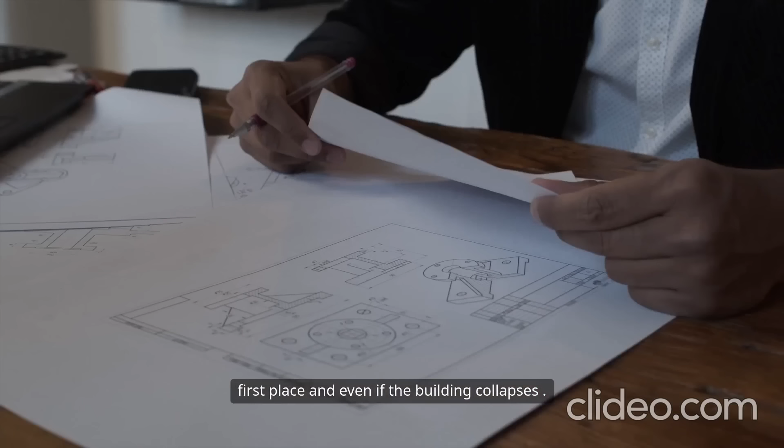Firstly, through ESHER, the safety authority would have had duty holders who would have been accountable to monitor and gauge the building and control the stability, ensuring that the workmen and public are not put at risk in the first place. And even if the building collapses, it shall be managed in such a manner that if the building becomes unstable at some point in time, a large exclusion zone would be there to handle any hazards till the rectification process is finished.

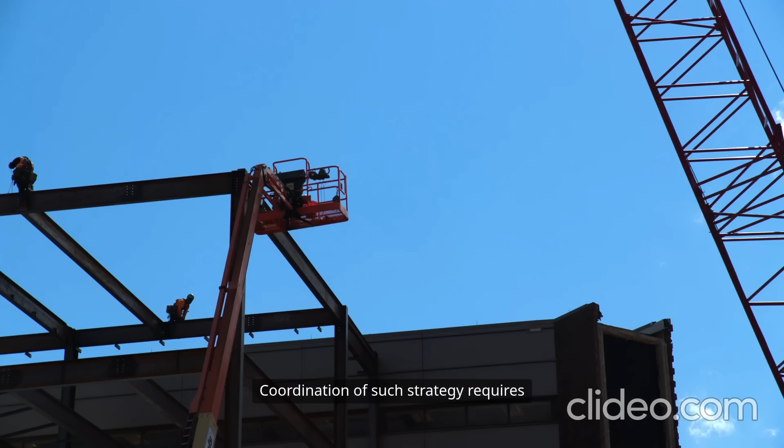There are safety issues that need to be handled in any construction project. Coordination of such strategy requires the interaction of the clients, planners, engineers, and architects (Fayette Allard, 2000). Effective communication between all project participants at strategic, operational, and tactical level is the prerequisite for the successful containment of the risks. It is essential that clear objectives are established for the management of health and safety before refurbishment work begins. Objectives must be unambiguous, specifying which health and safety risks are to be managed.

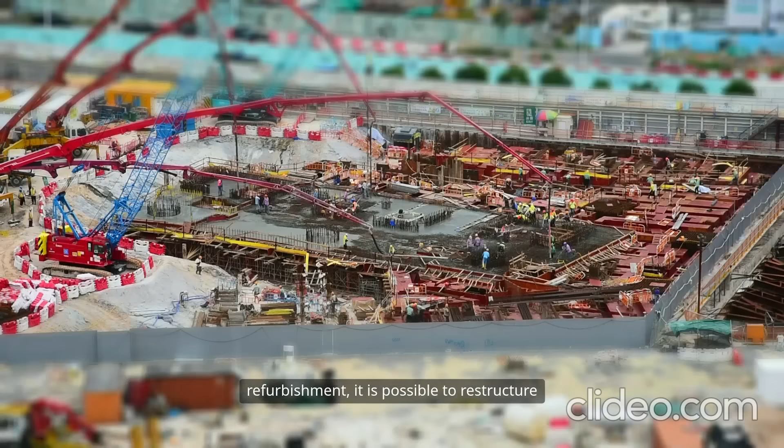As adopted from Measurement in Evidence-Based Design, 2017, it is important to verify the principles and policies that are put into the refurbishment process. Based on the generic research framework to support the use of EBM in research into safety management for building refurbishment, it is possible to restructure and refurbish the buildings. The same applies to the procedural implementation of the framework to collect data and information from accidents and failures, as well as contemporary good practice and innovations.

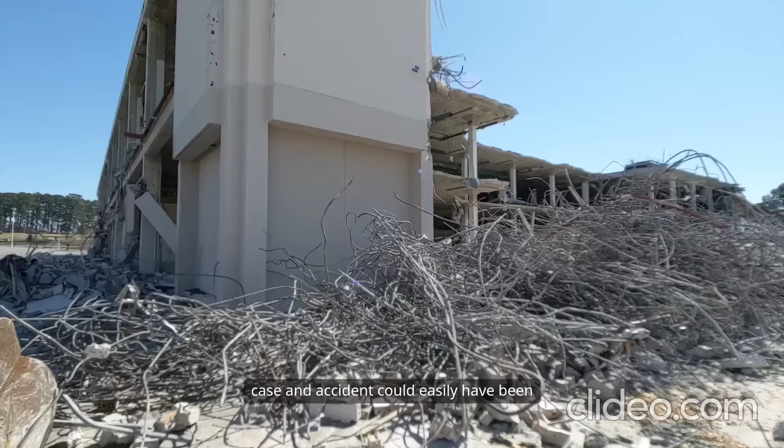However, to ensure work would not be hampered due to any condition, professional engineers are entitled to such procedures, which is why EBM and ESHER are important. With the help of ESHER, it is certified by the safety authority that there are no hazards and danger to the workmen or public. It clearly showcases that the aforementioned case and accident could easily have been avoided by implementing the ESHER and EBM approach. Building refurbishment demands careful attention to safety and risk management at every stage.

For clients with limited experience, understanding and implementing effective safety measures is crucial, but even seasoned professionals can benefit from these insights. Evidence-based management and the equivalent standard approach provide frameworks for assessing risks, enforcing safety protocols, and ensuring compliance. By prioritizing employee well-being, managing hazardous waste responsibly, and adhering to regulatory standards, refurbishment firms can enhance productivity and create safer, healthier environments for everyone involved.

Based on the research undertaken, building refurbishment requires a lot of safety and consideration of several factors to ensure that all risks involved are managed effectively to minimize any dangers. It is intended particularly for clients in refurbishment firms who have limited experience of refurbishment in buildings, but it has lessons for more experienced experts. The entire study shows that the refurbishment industry needs proper accessibility of safety measures and needs to make good use of safety management tools.

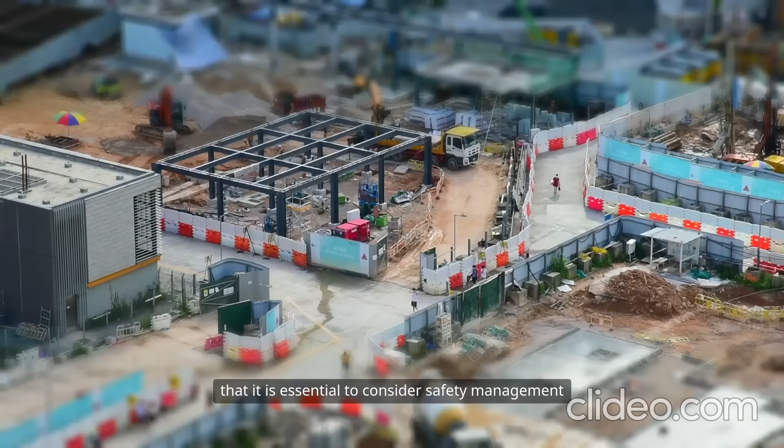With the help of this, the different managerial services can be protected, and at the same time, the working conditions of the employees can also be uplifted. Proper attention also needs to be provided to the employees so that they feel protected in the working environment. The understanding developed through the EBM and ESHER approach helps in analysing situations, showing that it is essential to consider safety management before refurbishment of any project. Thus, there need to be proper risk and safety policies which will ultimately help in governing the different measurements, as well as giving better productivity.

The healthy environment is crucial for the staffs that are working there. They need to be protected and secured enough. There need to be proper treatment regarding the hazardous wastes, and at the same time, the relevant enactment of the different rules and the procedures.

Evidence-based management does not depend on experiences or disposition. The research is valid enough as it will motivate and suggest the refurbishment process in managing refurbishment risks. Using building refurbishment policies allows them to take effective measures to reduce refurbishment risks.

The refurbishment industries in the UK need to implement their policies taken from EBM framework to achieve the sustainable goal. By adopting building refurbishment techniques and strategies, UK refurbishment industries can upgrade their quality of performance by making reasonable changes, which will lead towards success.

ESHER is equivalent standard approach that is applied to a specific aspect of an operation or installation. It comes under alternative safety approaches, ASA, constituting to which evidence-based safety analysis is derived. This approach provides for the replacement of one or more than one requirements taken into consideration under the Regulations Act.

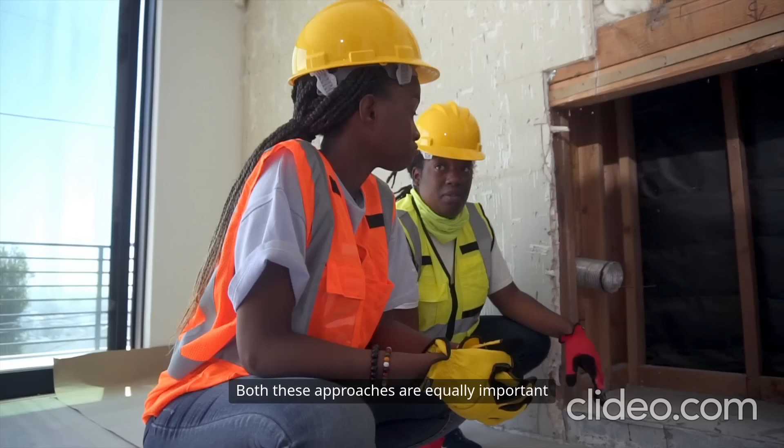Crilly, 2001. Both these approaches are equally important while refurbishment, since they assist in safeguarding and mitigating dangers and health hazards, while protecting workmen and the general public from accidents such as outlined in the case study. Control measures shall always be implemented, which is done through EBM and ESHER approaches.

Especially, ESHER approach is such that it ensures that work wouldn't compromise stability or put the lives of workmen and public in danger. ESHER approach inspects the bracing arrangements and safeguards the refurbishment procedure. Assessment of the stability and inspections along with risk assessment is carried out beforehand through ESHER by safety authority, and duty holders already make it certain that there is structural support comprising temporary bracing and stability.

However, it is recommended that ESHER and EBM approaches shall be applied before starting or planning, to begin with, refurbishment, since these approaches are essential in safeguarding people and workmen and in building a robust structure.

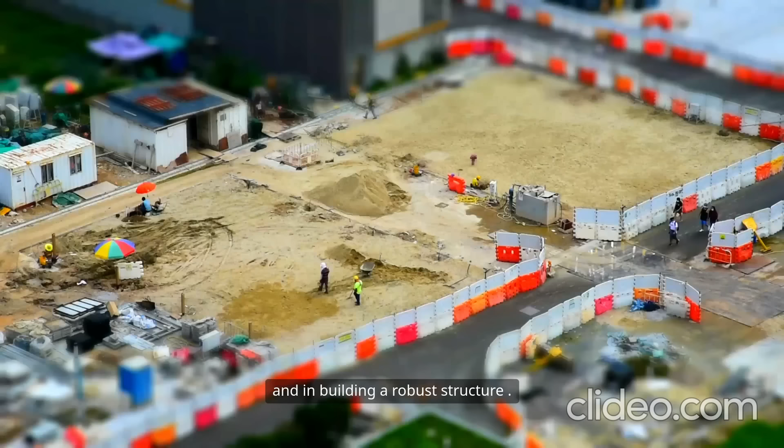This section covers available methods or tools for knowledge reuse. Various information management tools are commonly used to collect and share building data, which can be broadly classified as KM technologies, IT tools, and KM techniques, non-IT tools, Al-Ghassani, 2003. KM tools, including groupware, expert or data directory, custom software, platform, post-project reviews, PPR, communities of practice, COP, etc.

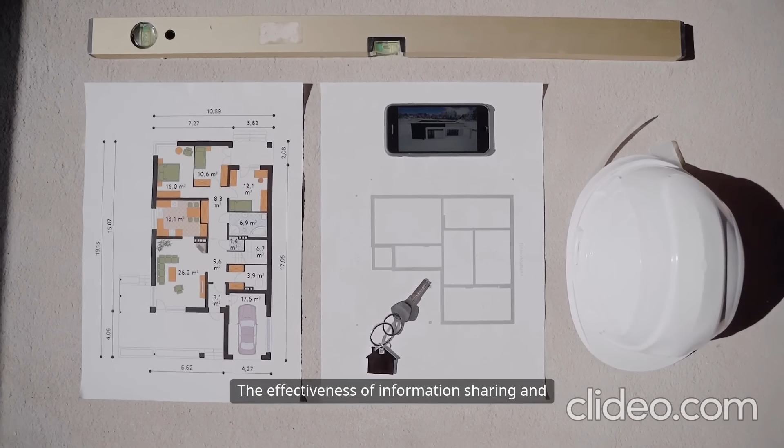The most common way is to build PPR and COP files for data collection and sharing, Orange, et al., 1999. The effectiveness of information sharing and communication in the parties is strongly influenced by reciprocity standards. You help me, and I help you, and the level of trust created in the community.

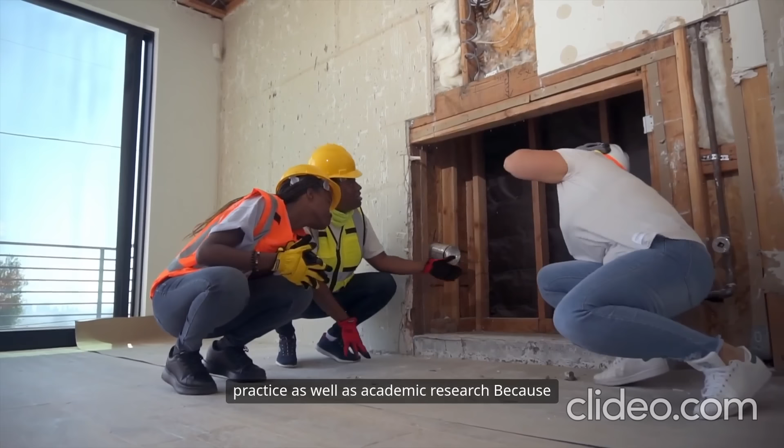Moreover, safety in design, as studied, provides an observation that the health and safety strategies are best reviewed and understood when applied. It is clear through a literature review that both practitioners and academics have paid high attention to the importance of health management and safety practices at the design stage, and current progress are found in companies' practice as well as academic research. Because knowledge reuse can help designers to learn lessons from previous projects, it is important to incorporate an effective knowledge reuse process in design to improve health and safety at construction and operation stage.

As a useful tool for knowledge reuse in practice, the evidence-based method has been applied across many industrial sectors, but has not been applied with regards to health management and safety practices in construction design stage. From this point of view, new research pertaining to experimental methods of improved health management and safety in design is in need.